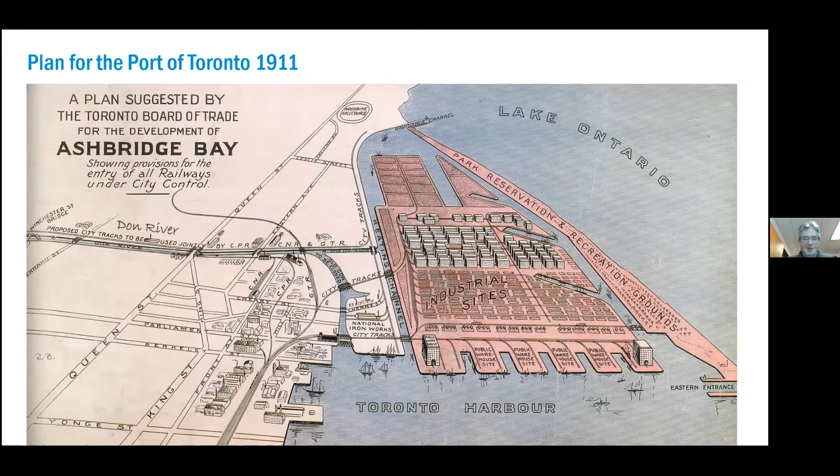Now, this is the other river in Toronto, the Humber River. When we had a hurricane, which is very unusual for Toronto, we don't tend to get hurricanes this far inland, but this hurricane basically wiped out every house and structure that had been built in the Humber River Valley in 1954 and gave the city 5,000 acres of River Valley parkland back. And redevelopment was prohibited after that storm.

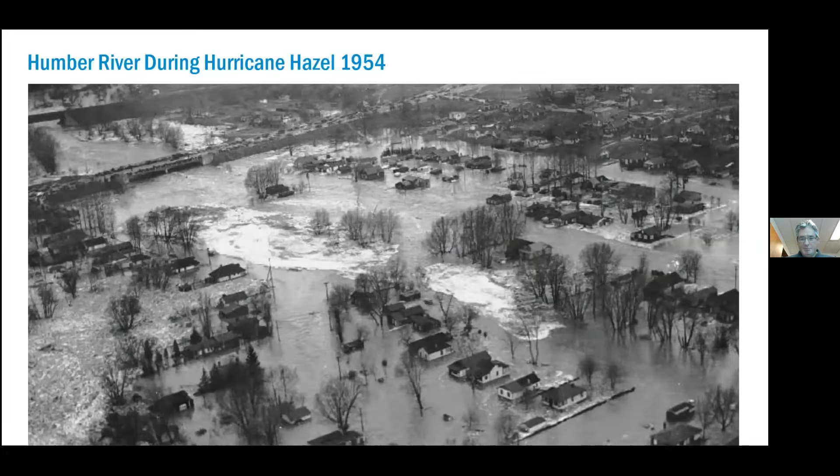That led the regulators to realize that the Don River, like the Humber River, could experience that same level of hurricane rainfall. And so by the 1980s, legislation had been put in place designating the whole area around the lower part of the Don River as flood area.

So these two blue zones are what were called the two spill zones. You can see spill zone 1 goes quite far to the left. It comes all the way over, in fact, to our central business district. Everything in that blue zone from about 1980 onwards was not allowed to be redeveloped. So it froze all of that land. The same has been true for spill zone 2.

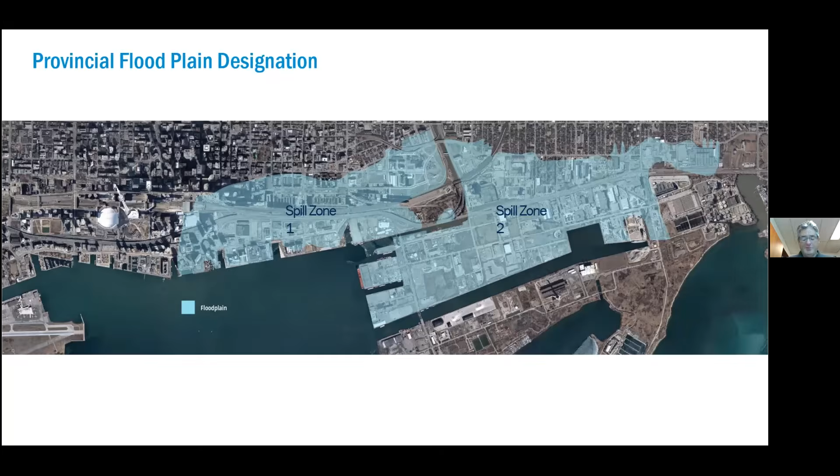So this actually presented a huge barrier to our waterfront revitalization. Many cities have these former industrial waterfronts, but ours couldn't really be redeveloped without flood protection. And the scale of the flood protection project was quite large.

It led to the creation of the organization I work for, which is Waterfront Toronto. We're a unique public corporation in Canada because we are equally owned by all three levels of government. So the federal government of Canada, provincial government of Ontario, and the municipal government of Toronto are the three shareholders.

That second batch of funding, the 1.25 billion, was exclusively for the flood protection and infrastructure project and naturalization of the river that I'm going to show you today.

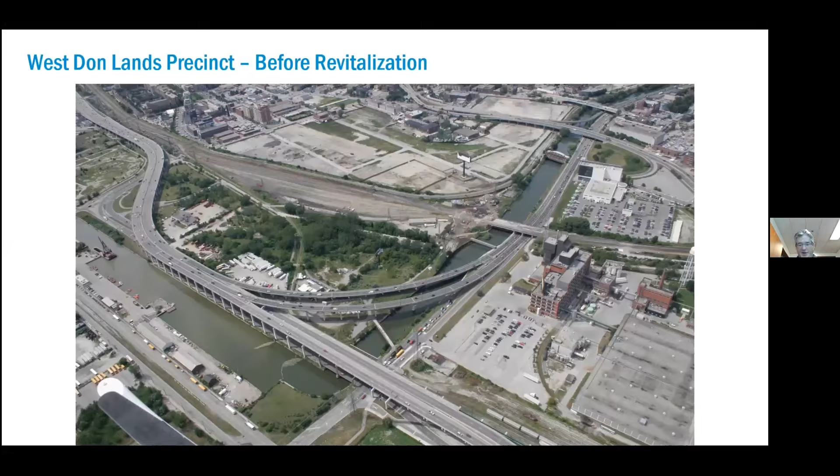So they gave the land to the province, and the province was never able to come up with all the money to do the flood protection either. So it sat like this for about 20 years.

Then when Waterfront Toronto got started, this was one of the first precincts we did. We brought in the urban planning firm of Urban Design Associates from Pittsburgh to do a master plan that would blend the flood protection, a park system, and urban revitalization all together into a new neighborhood.

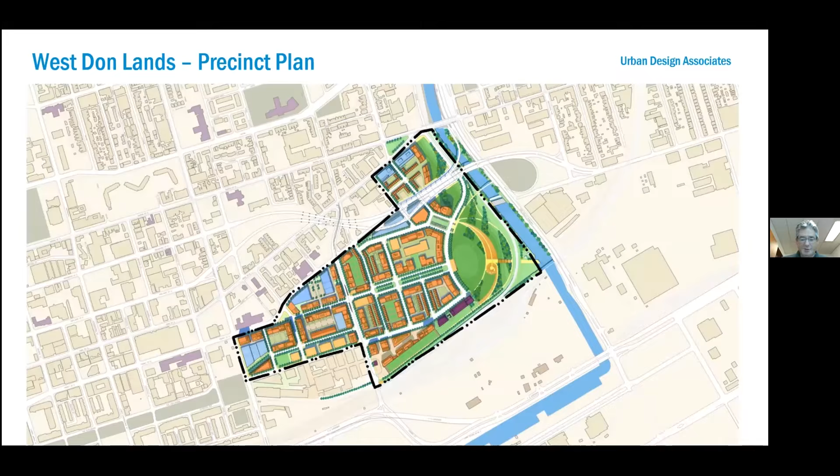And here you see the original plan for it. And then here you see a diagram of what it started to look like as the public realm designs came along and some of the buildings started to be designed.

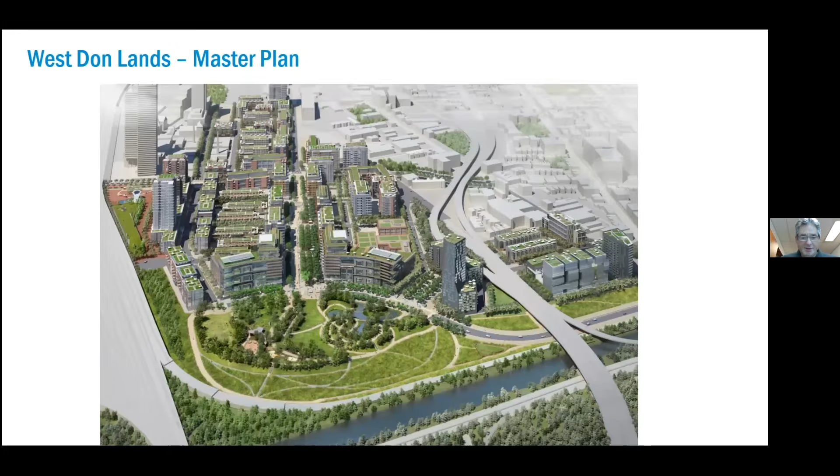So the flood protection sits in the very bottom there and is integrated with an urban park that we call Corktown Common. And here is Corktown Common and the flood protection under construction, and a huge stormwater retention pond during construction, and the site cleared.

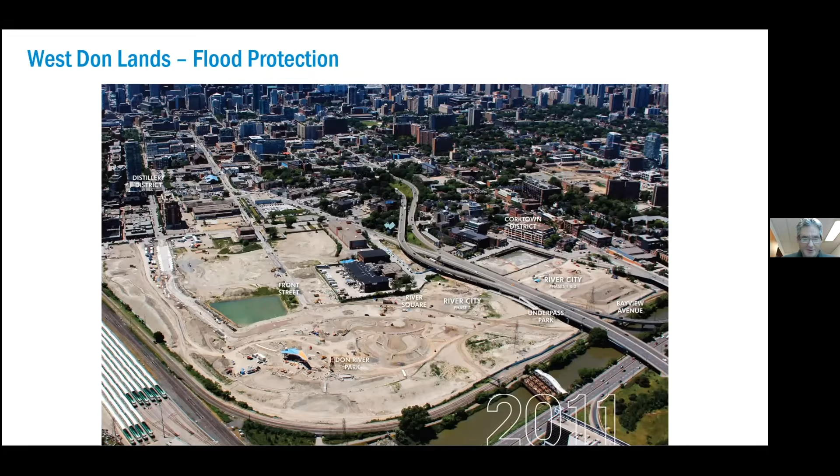You can see towards the bottom, the park pavilion, right next to the words Don River Park. Just to the left, you see a kind of wing-shaped roof - that's our park pavilion in Corktown Common. This drawing shows it a little bit better.

The presence of the park increased the land value. They sold those units for more than they had expected to because these residents had this fantastic park asset right across the street.

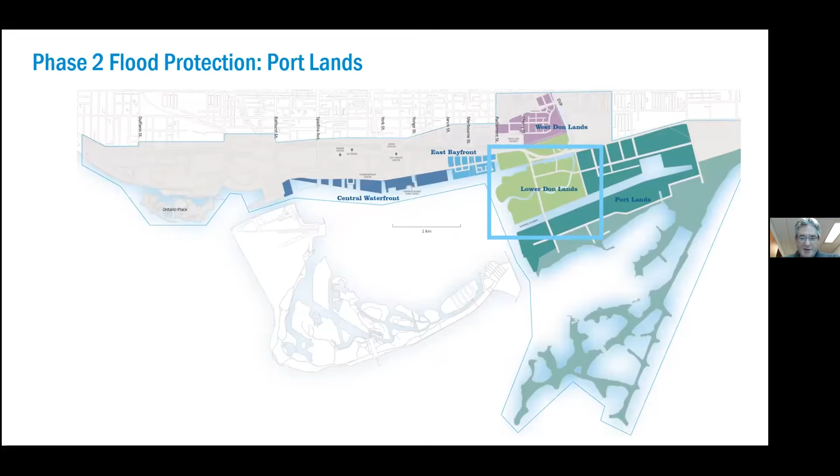I'm going to move now to the second phase of flood protection, in an area we call the Lower Don Lands - that's spill zone 2. You see the word Portlands - that whole area used to be the freshwater marsh I mentioned at the beginning, which was filled in to create the industrial port that never really materialized.

There's been a 40-year-long effort to naturalize the river, to take it out of the concrete channel it's in and create some habitat. If you can't necessarily see it clearly here, had it been widened and naturalized there, it would have been right underneath our elevated expressway, which wouldn't have made for the greatest natural environment with concrete columns holding up a highway above. It also would not have really enabled that river project to catalyze new development.

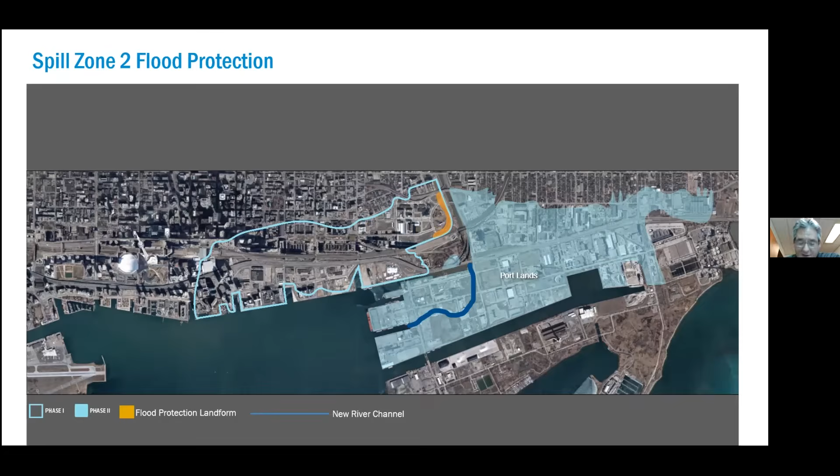So one of the early projects I did when I started here was to say, let's do a design competition and really treat the river as an asset and as the center of a community. We set out 2 goals for this design competition, which by the way was not just design in the landscape sense, but we called for multidisciplinary teams.

Each of the competing teams had about 15 to 20 different disciplines on it: civil engineering, hydrology, ecology, urban planning, everything. The idea was to create an identity for the Don River that both flood protected and restored the habitat. The second goal was that concept had to integrate new development, transportation infrastructure, parks, and the river mouth into one strong, harmonious piece of urban fabric.

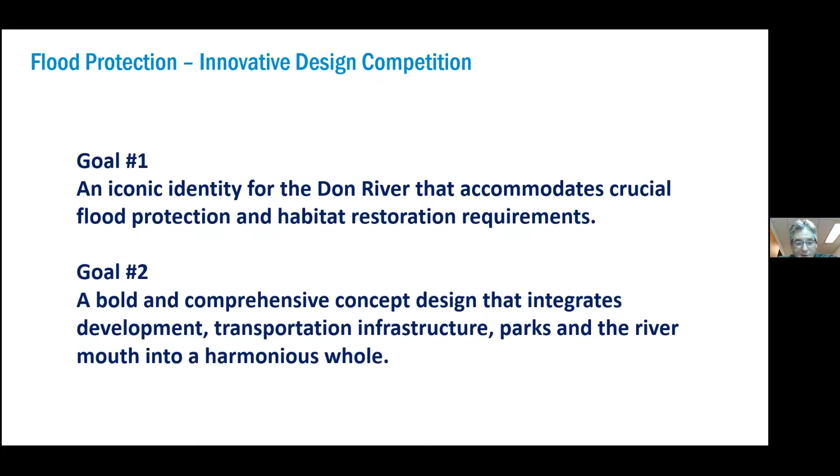It was an unusual design competition in that it had to deal with multiple parameters, but it had to find a way to synthesize them, because until that time this had been moving along as very much an engineering study only as to how to manage all the flooding. Then the idea was we would just have some soft riverbanks and bring some ecologists in later to plant some native plants, and we would have achieved the goal—which I don't think would have really been very powerful. So the competition yielded this whole new idea that no one had thought of.

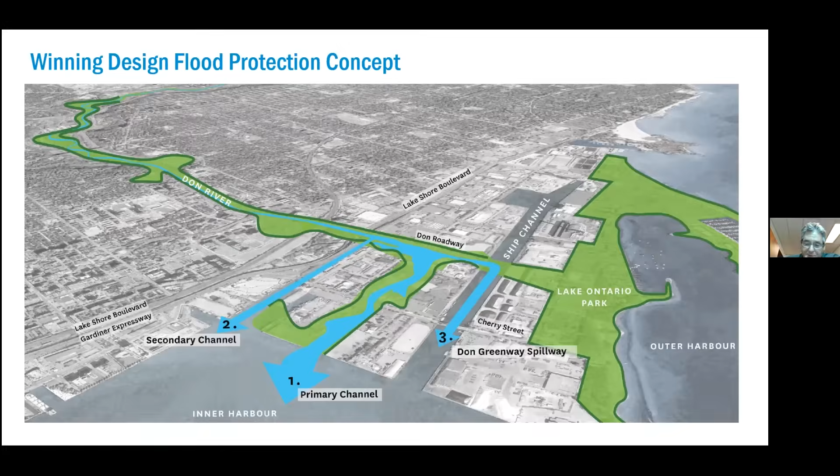We're talking 100-year plus storm events, not annual, and then we use the main channel the rest of the time for the typical flows, which aren't all that high in the Don River. The result was this winning scheme, which proposed a whole new precinct. In the process, it also proposed a whole new island.

You see the Keating Channel there on the top was the end of the river. Since we carved it south and then west to create the new river mouth, we ended up with an additional island in our harbor. Now the outer part of our harbor is defined by islands, and it's an island park system that's quite loved and quite well used by the whole city.

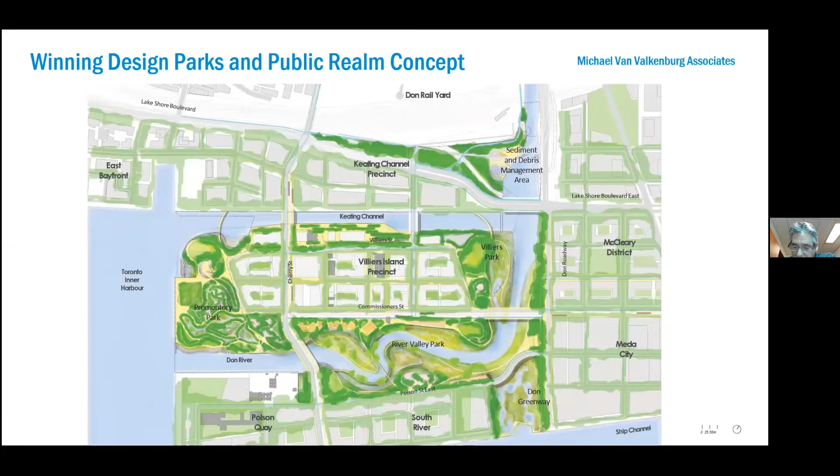This area has been kind of not on anyone's map of the city at all, but this project really is starting to put it there, and people are starting to take notice. This will be, I think, the single biggest new piece of park infrastructure built in the downtown in probably the last 50 or 75 years.

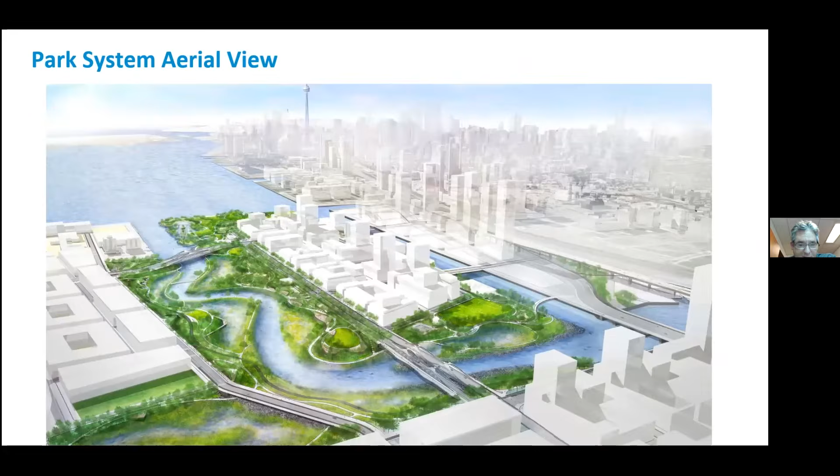Here's an aerial view, and you see the river with the wetlands on either side, and then the upland park system. I'm just going to walk you through the components.

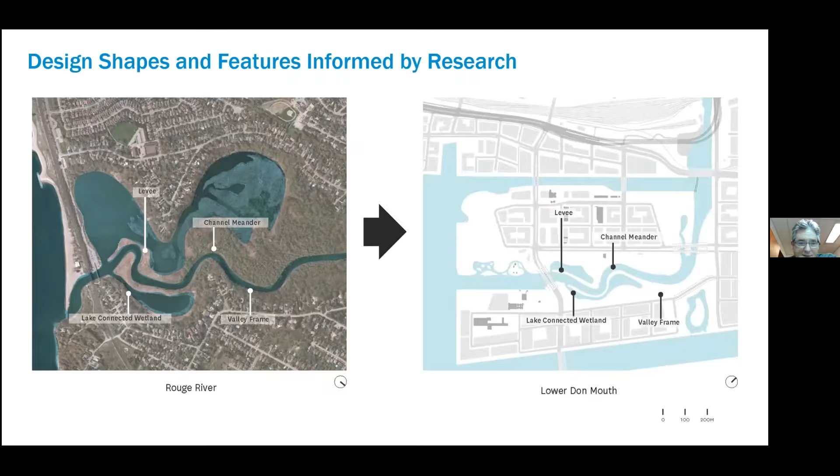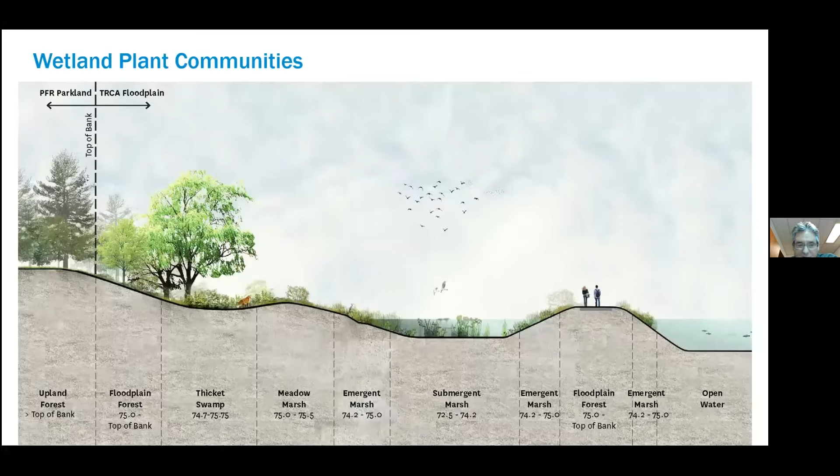My slide doesn't want to change now. Come on, there we go.

This is a cross section that shows the subsurface conditions we had to wrestle with. This is very much engineering being used in service of nature, rather than trying to engineer nature directly. It still uses some of the best ideas and techniques of engineering to support a really naturalized environment.

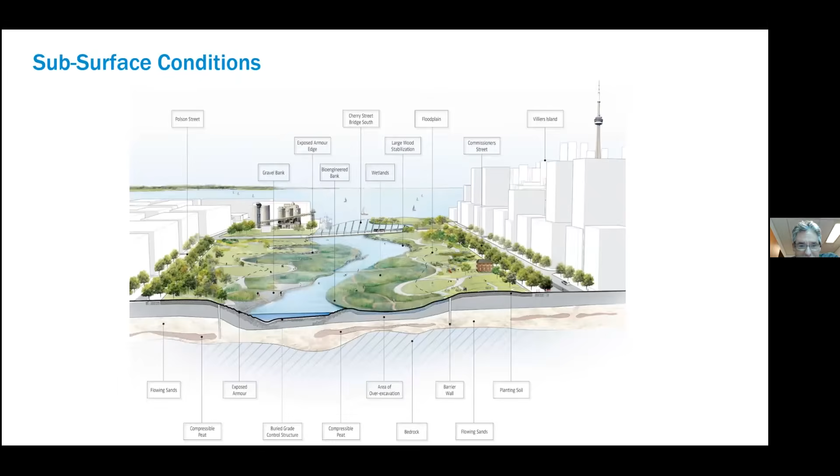These are more examples of the typologies and target species we wanted to provide support for. These landscapes are fine-tuned to provide the places that each of these types of animals and fish like to inhabit.

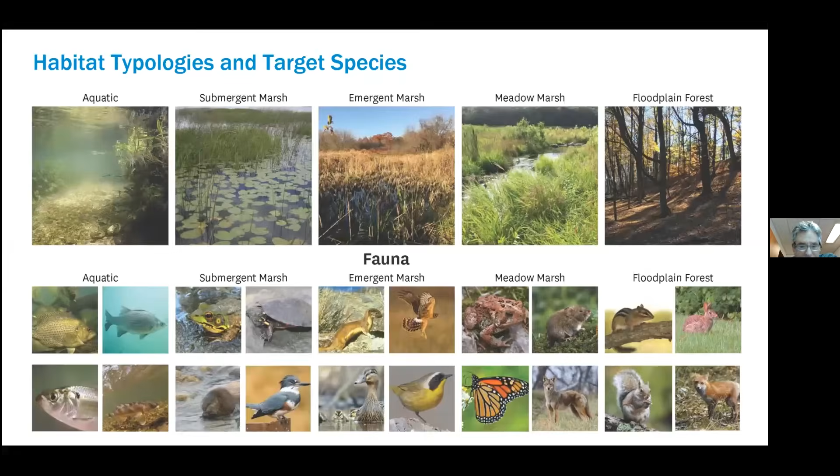Then there's more obvious constructed habitat, like bird boxes. We're doing a lot of anchored wood, which you see on the upper right. Those are actually held down with cables and weights so they don't float away, and that's a very popular habitat type for lots of species.

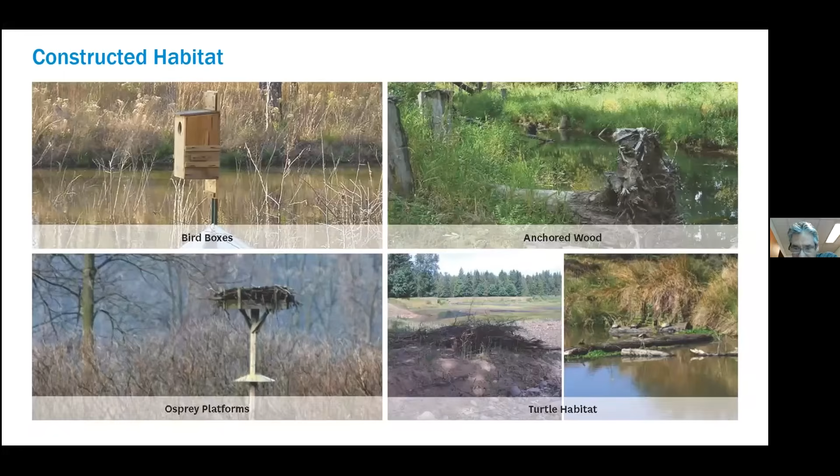Even the stream bed under the river is being carefully designed with the right size and shape of stones for fish habitat. Now we'll talk about the parks.

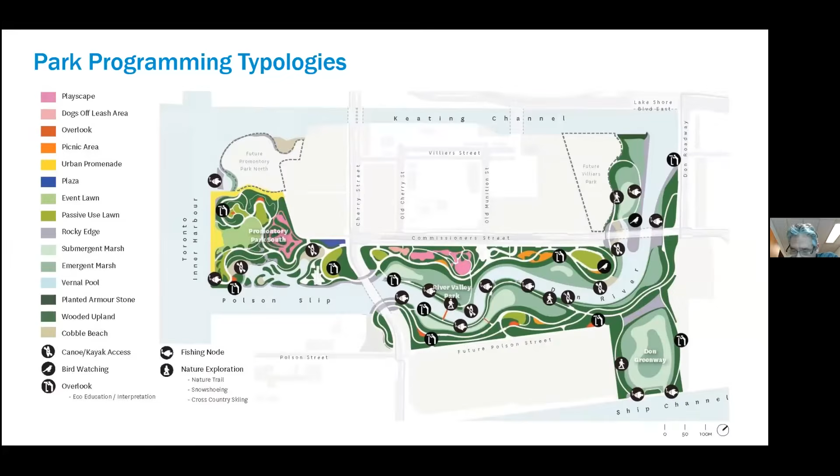The parks themselves have a range of program. This area is more urban, more formal park with less wetland area. We've got everything from dog off-leash areas and picnic areas to canoe and kayak access, and overlooks for bird watching, distributed throughout the park.

Some of the elements we're incorporating include fire pits where people can have a fire. We have an indigenous population here that uses the fire circle for ceremonies, so we hope it will provide that function as well. There's also a large event lawn where we could do movies or music in the park.

This event lawn is actually modeled on Brooklyn Bridge Park, which our landscape architect designed. We know there are a couple of organizations that do nature camps for kids interested in running their camps here.

In the middle is something we call Destination Play. If you've been to Maggie Daley Park in Chicago, it's a totally immersive play environment over multiple acres that gets kids active and is a compelling enough playscape to get kids off their screens. Maggie Daley attracts people from all over the greater Chicago area, with thousands of kids there every day. It's fantastic, worth the trip if you get the chance.

There are also picnic areas, cross-country skiing, and other typical park events. And then we've paid a lot of attention to water.

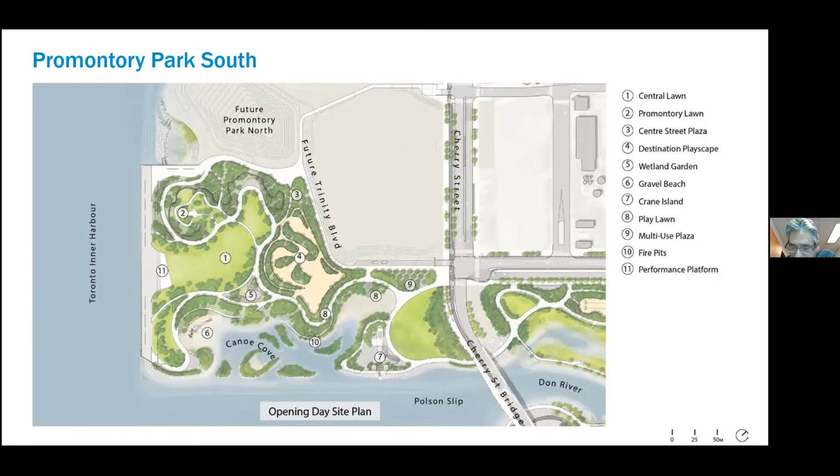And we've actually preserved number 7, which is an Atlas crane. They were the most powerful cranes used on the Great Lakes. They're all basically gone from the Great Lakes anyway, and this is really the only one left, being preserved as a heritage piece. It won't be a functional crane anymore, but it'll be kind of an artifact in the park.

I already spoke a bit about the islands. They'll be heavily vegetated. One will have a little beach area so you could canoe to it. The others will, I think, essentially be inaccessible unless you're going to kayak over to them.

And then the destination playground, which I spoke about, will have its own sort of design language that's really about kids, right next to the crane, which I think is something that kids get excited about.

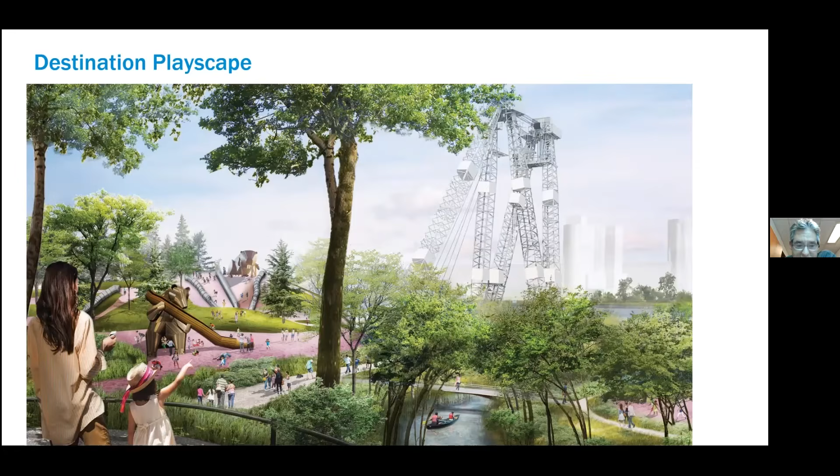We'll create a very unique playscape, probably unique to Canada. There's only a couple of these in North America. There's the one at Maggie Daley, which I mentioned, and the other is in Tulsa, Oklahoma. They built a similar kind of destination playground and targeted around 800,000 people a year. In their first year, they had 2 million. So there's a real pent-up demand for better playgrounds that challenge kids and are engaging for adults too, and that's what we're targeting here.

So the whole levee pathway system, and some of the canoe and kayak launches, will be inaccessible, but that landscape is being designed to withstand that so there's not a huge amount of fix-up work to be done. If the waters are moving fast, they may rip out some plant life.

But the pedestrian bridges, which are a few of the only obstructions in there, are going to be designed to withstand the floodwaters. They have a minimal amount of freeboard, so they shouldn't restrict the water flow too much, and we've actually planned for how much friction they create so we know we've got the flood conveyance capacity.

But we needed the bridges because if we didn't have them, the river would only be crossable at its two far ends, and it's almost a kilometer — it would have really isolated one side from the other, which we didn't want. So now we have a circuit that can meander through here.

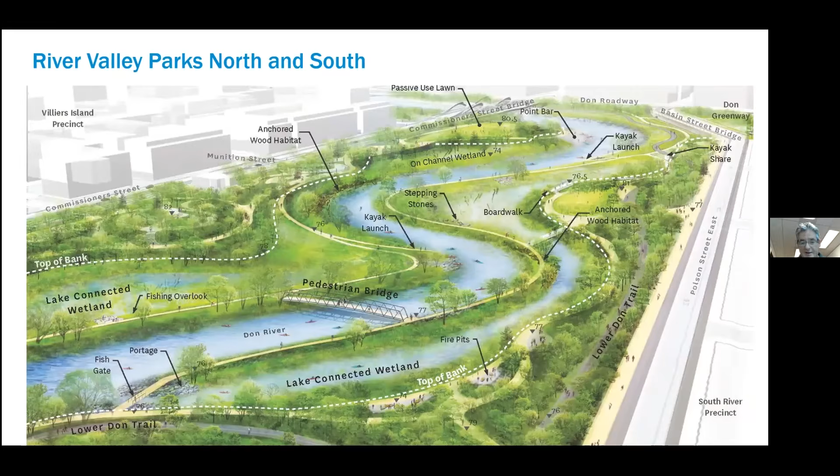So we've doubled, on Villiers Island, we've doubled the amount of waterfront property, which is almost all property owned by the city. So when this gets sold to private developers for development, the city will get a much bigger return on the value of their land than they would have in the old scheme, which would have rebuilt the river in its present location underneath the highway, and would not have had the impact that this is going to have, either aesthetically or functionally as an amenity.

This is the second piece of park, River Park North. This is going to have a nature play focused playground, so there'll be two nodes for kids. The destination play is a bit more active, a bit more play equipment structured. The nature play one will be very focused just on bringing kids into nature and having them experience things like logs and trees and other natural elements, and be more wooded. Then on the right-hand side, number 5, 6 will be picnic lawn and picnic areas where you'll be at this very dramatic bend in the river.

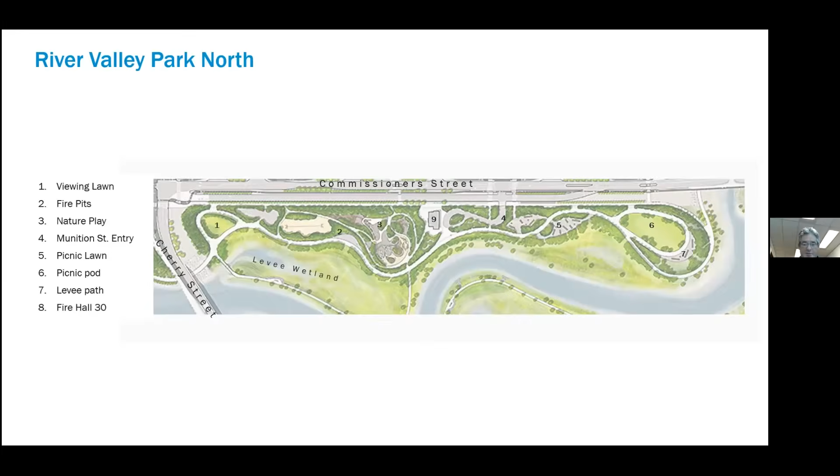So again, we have this kind of mix of more active recreation and passive recreation, all framed on the north by a kind of forest frame, and on the south by the wetlands. And here are some views from within that River Park North, looking south across the river and to the levees.

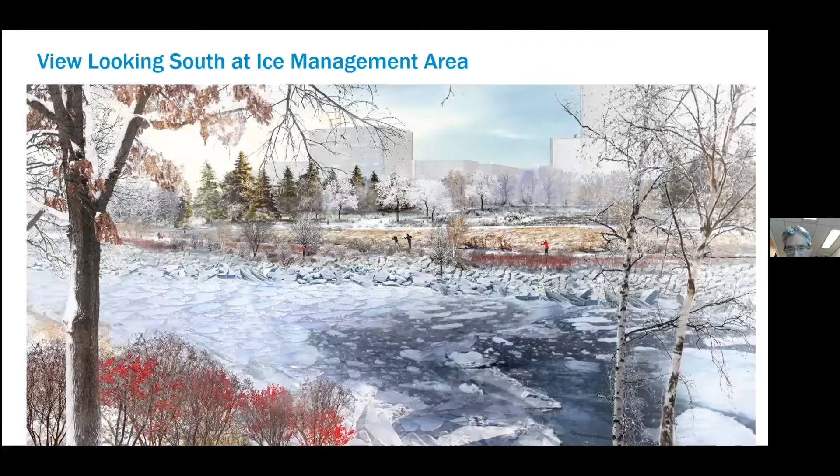We have to prevent scour, and the river does freeze and have ice floes in it. So there is a lot of armor stone in the points where the river takes a bend, but where it doesn't, we've actually managed to use, again, the submerged trees to reinforce the edge and create more habitat. You'll see some photos of that in a minute.

And then the River Park South, we have created a grade separated bike trail. In Toronto, we have quite a bit of conflict between pedestrians and cyclists, particularly in parks. We have like path rage, where you get angry pedestrians screaming at cyclists who are cycling through the park that they shouldn't be in there, they should be out on the road. This kind of takes a cue from Central Park and tries to create a grade separated pedestrian trail with bridges and tunnels so that you can bike through without interrupting anybody who's taking a stroll, and then connect up to our on-street bike trail that goes across Cherry Street.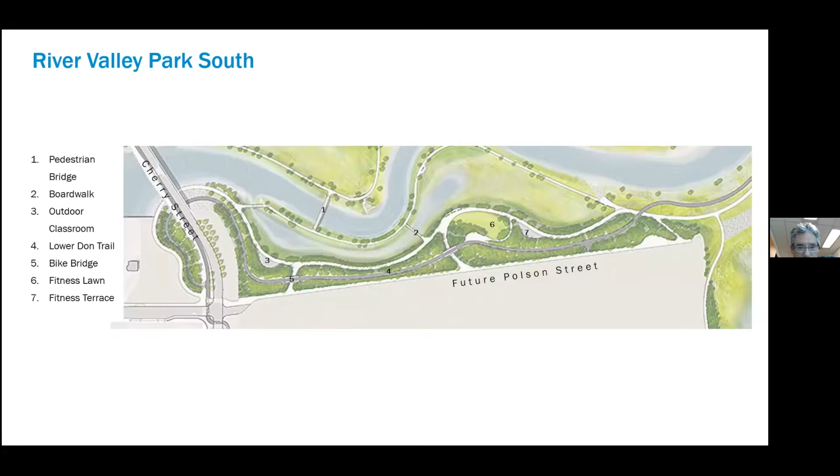And then probably the most habitat-rich piece is what we're calling the Don Greenway, which is another one of the overflows. This has a habitat island, which is meant not for humans, but just for animals. This line connects up to something called the Leslie Street Spit, which is a 4-kilometer long armature that was built to receive dredgeate from the Toronto Harbor. But nature has taken it over to the extent that it's become a wildlife refuge now. And so it's going to be decommissioned for accepting lake fill and turned over really as a habitat park.

You can walk in, but it's vast, and certain areas are closed off. But it is part of what's called the North American Flyway, so all of our migratory birds that head south from Ontario tend to fly right over this spot. Lots of geese, as well as lots of monarch butterflies. We get a huge monarch butterfly migration right through here. So these protected islands become pretty important places for those critters to rest before they fly south across Lake Ontario.

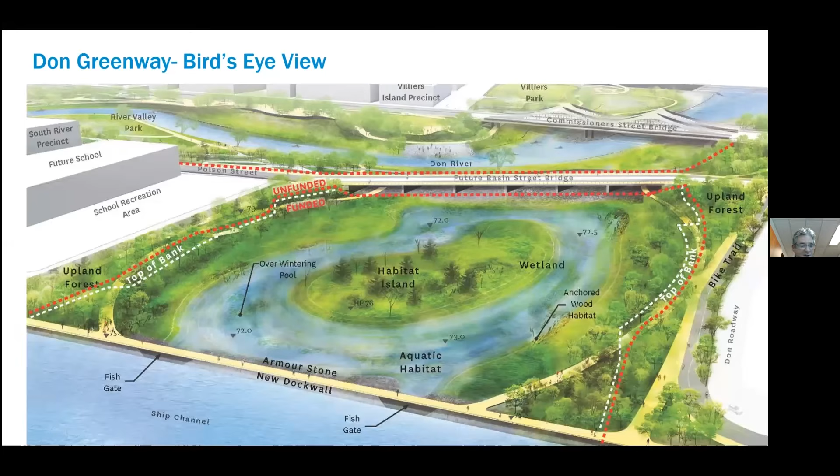I kayak a lot on Cape Cod, and whenever you see a great blue heron there, it's just an amazing experience. If we can bring that into the city, I think it really signals a new direction in this blending of ecology and urbanism together.

So I just want to show you some photos. This is not a dream project. This project is now in its third year of construction, fully funded, as I showed you at the beginning.

Here you see an aerial photo, and this is actually a bit outdated now, but you can see the outlines of the river, and in the middle, a lot of mud.

We're actually building a caisson wall, which is our cutoff wall, as we call it. We're putting piles right down to bedrock to build a concrete wall the whole length of the channel. But it's not like the Keating Channel, where it's a hard-edged wall. This is very far back from the river, but it prevents contamination in this industrial land from migrating into the river.

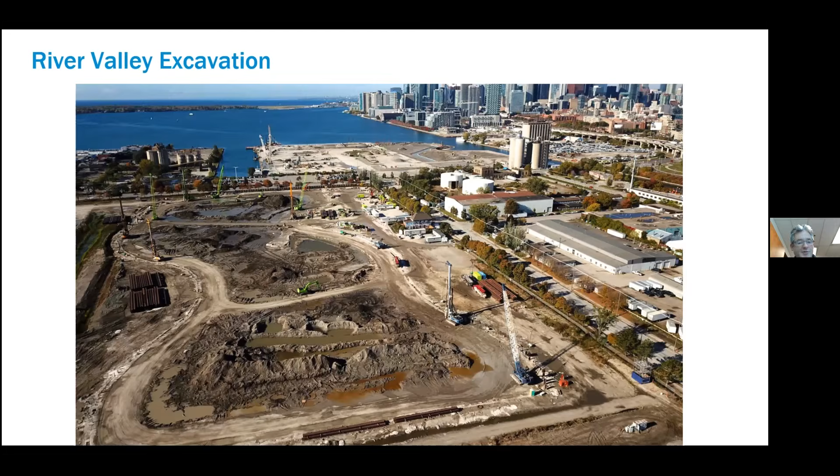One of the challenges with river deltas is they flip around when they aren't controlled, making development very hard. There's a lot of pressure to make this land available for development, so the river had to more or less stay in one spot. This is how we've achieved that.

This gives you a sense of the scale of the activity. The bedrock's deep here. There are only 4 caisson drillers in North America that can drill caissons deep enough to meet our bedrock, so we had 2 of those 4 caisson drillers on our site.

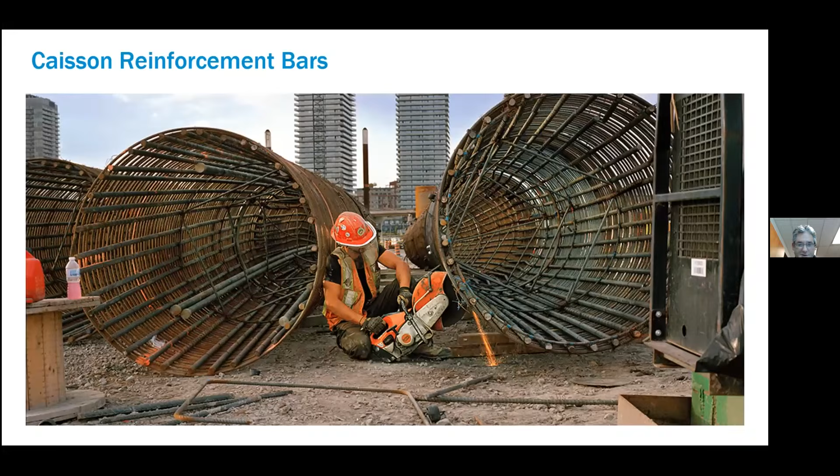We're now finished with the walls, but we had 50% of North America's deep piling capability working on this river. The caissons are pretty beefy, concrete with steel reinforcement. This is a huge industrial scale operation, but it's not going to look like it at the end.

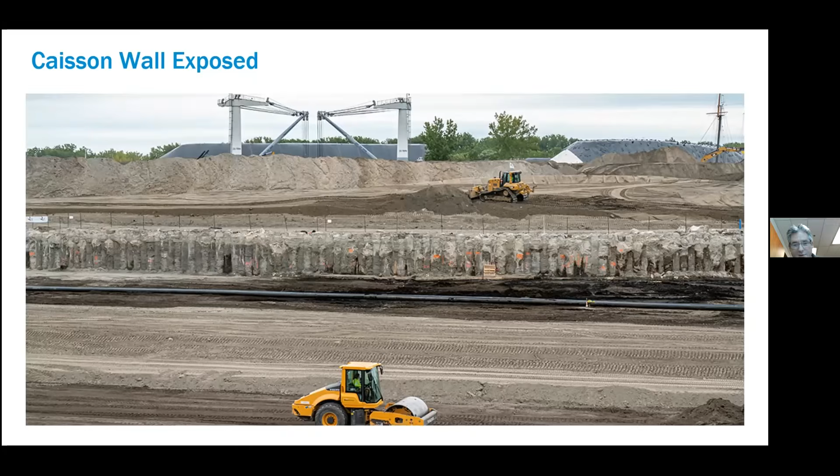There you see the caisson wall. Once the caissons have all been poured and hardened up, we then dig out the new river channel, and then we have to put down a geomembrane to keep the contaminants from ever seeping into the river, so the water stays clean.

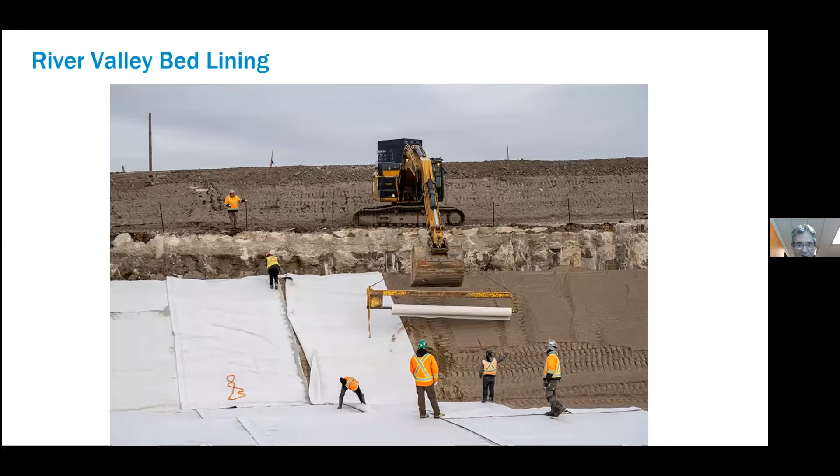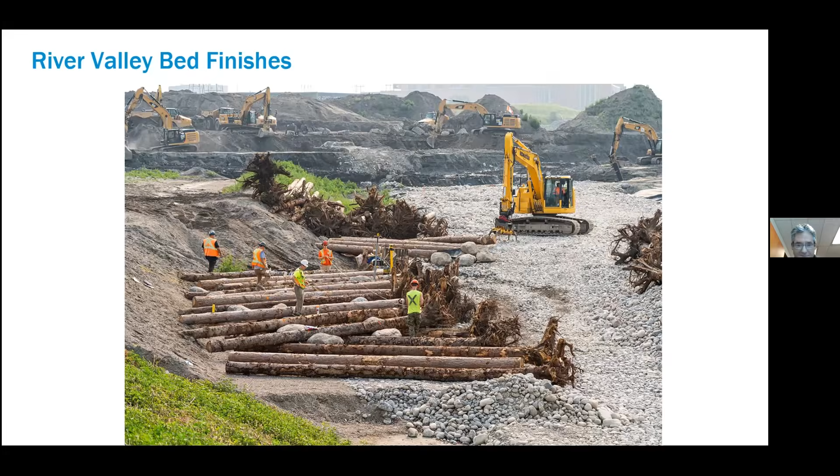This is what goes on top of the geomembrane, the rock bed for the stream bed. Here you see the logs I've talked about being used to protect the river edge from scour and also create habitat.

They're being shaped at a shipyard in Amsterdam, and then the pieces are shipped over to a boat building yard in Halifax, who assembles them all. Then these bridges are floated down the St. Lawrence River from Halifax to Toronto, and they come into the harbor on a barge, with a couple more coming.

We post footage of these things making their way along the waterway. We're hoping the next one will arrive before the seaway closes, which would be sometime in November, since the seaway has to close due to ice. Otherwise we won't see the next one till next year.